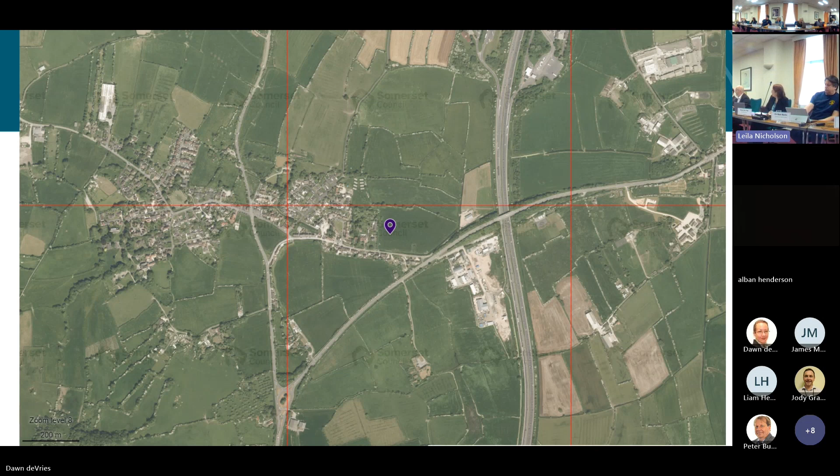So zoomed in more detail, it's a single large field. The application site excludes this area, which will come up on the red line plan in a minute, but just the area on the eastern side of the site. It isn't part of the application site, it's an irregular shape, but it's currently laid to rough grass and hasn't really been grazed for a while.

I've got a number of photographs over the years to show how the site has changed. There is the application site, very irregular shaped. The development is on the western part of the site. The thin line on the northeast side is part of the drainage works that are proposed.

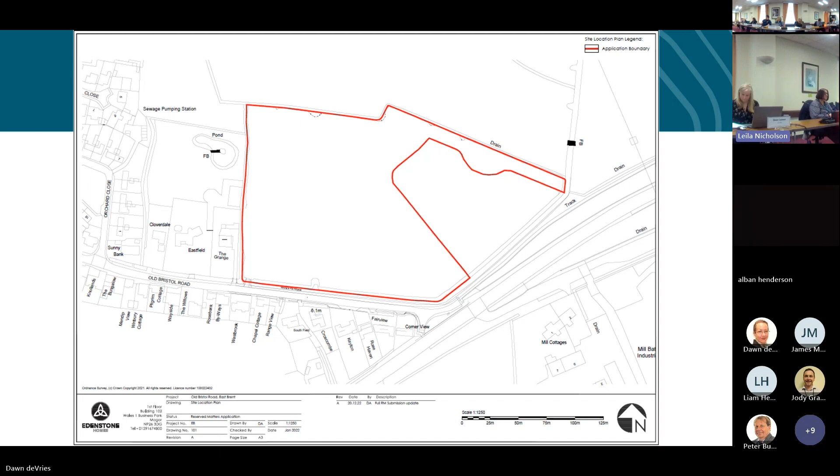That has now been agreed as part of the inspector's decision. The original outline went to appeal, the appeal was allowed, and the inspector has accepted that this can be provided. So that is all set in stone, as it were, through the grant of outline planning permission.

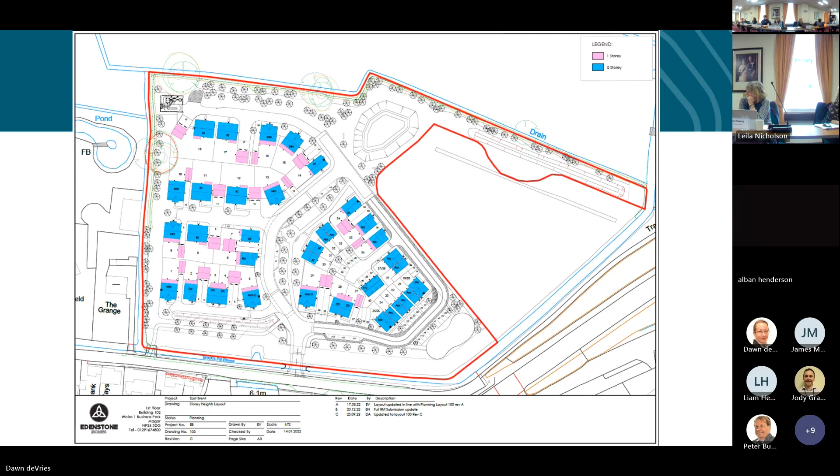Well, moving on to the drainage, just to give you a view of what we've got there at the moment. Brock's Pill Rhyne across the frontage is a maintained rhyne, the IDB look after that. And then the rhyne, the watercourse running along the west and north sides is maintained by the relevant landowners - I'll come back to that in a little while. But the IDB's area of control is across the frontage.

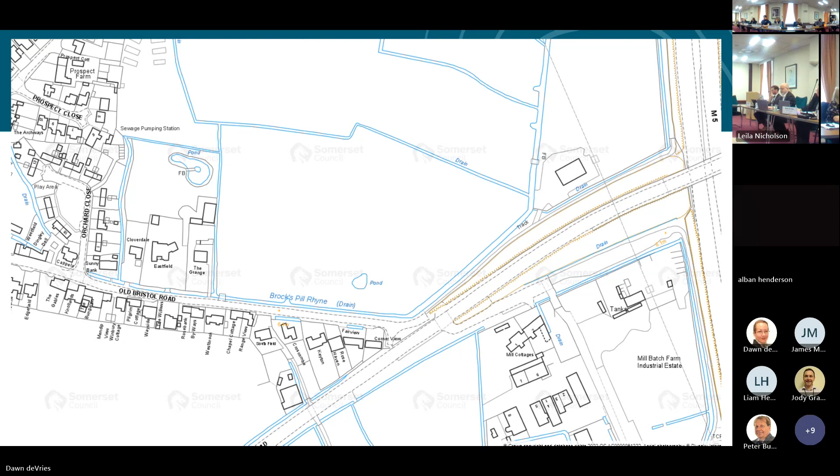It then discharges to the attenuation pond to the northeast, which then discharges via that pump solution into the swale that runs along the northeast side of the site, and then discharges into Brock's Pill Rhyne, which flows anti-clockwise around the site. That is all at agreed rates.

All the capacities and technical detail have been looked at by the LLFA, and they are happy that this is a working solution. We'll get the real technical detail through the discharge condition on the outline, but in terms of determining this application, they are happy with that.

So it is a pump, another pumping station there. Wessex Water do have pumps here, and they have not raised a concern about this scheme.

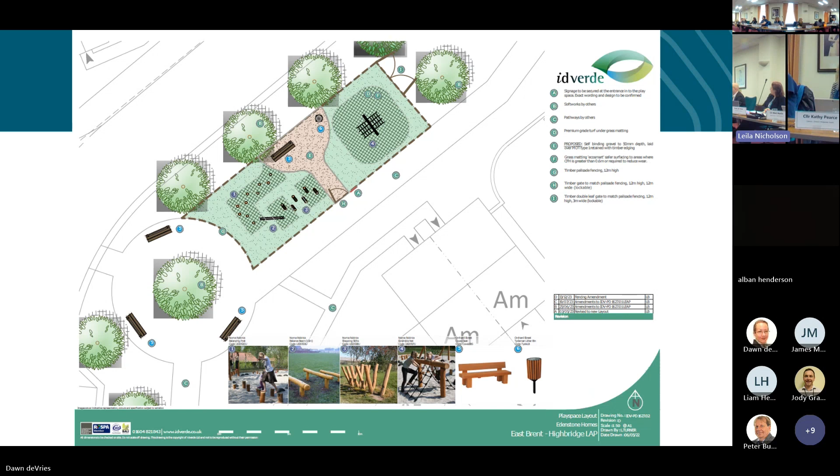Then the other area, which has more equipment on it for older children, down in that southeast corner of the site, indicatively laid out here. Again, the detail comes through this discharge of obligation.

There was an area of concern that this wouldn't be overlooked enough, being tucked away in the corner. I don't think I can agree with that. There are existing houses on the south side of Bristol Road with direct sight of it, just within 20 metres, that little row of houses opposite. So I don't think there's any reason to assume this would be an area of antisocial behaviour or play.

Landscaping, a landscape scheme throughout. I think we have a central area running through the middle which will have street trees, landscaped areas, and on-plot shrub planting in front of the houses. Round the north and west of the site, we have additional screening planting to mitigate the visual impact in wider views of the countryside. The issue has been raised down the west side.

There is a rhyne that is not maintained by the IDB. The IDB would normally expect about 6 metres there, but they are flexible on that requirement. I've got a little update on that particular point, with a slide and a photo coming in a moment to show that.

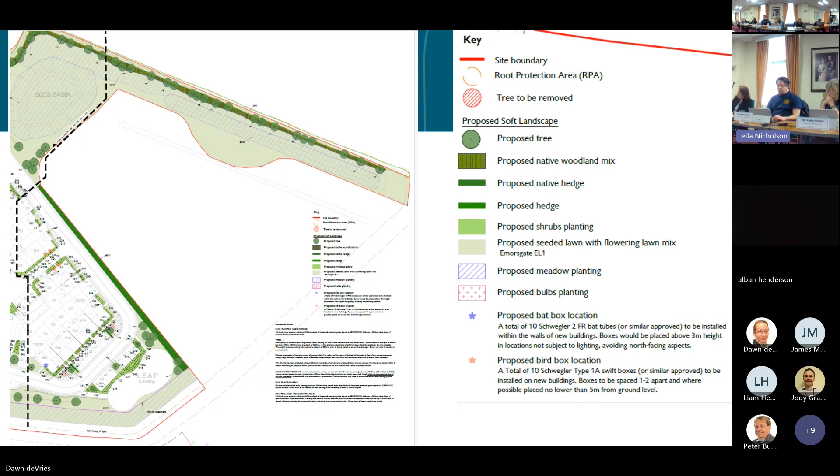Running through the other house types, this one's used on 5 plots, in render. The old one might have black tiles, but the majority here are brown tiles. This one's 2 houses together, one of the semi-detached ones, and one of a pair of smaller houses - you can see a nice organic form, like they've grown together over time, with one little flat over garage in brick in a more private area.

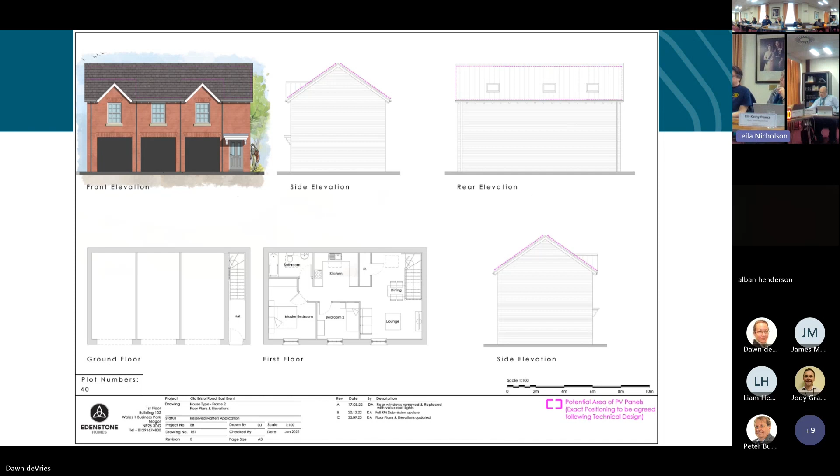I raised the possibility of rat running with the developer after local concerns were raised. They beefed it all up, and I've not had any further complaints since then that it is occurring. I do admit there may be the odd determined motorist who might choose to break the rules, but as with everything in life, unfortunately, we can't plan town and country planning on the basis of that fear.

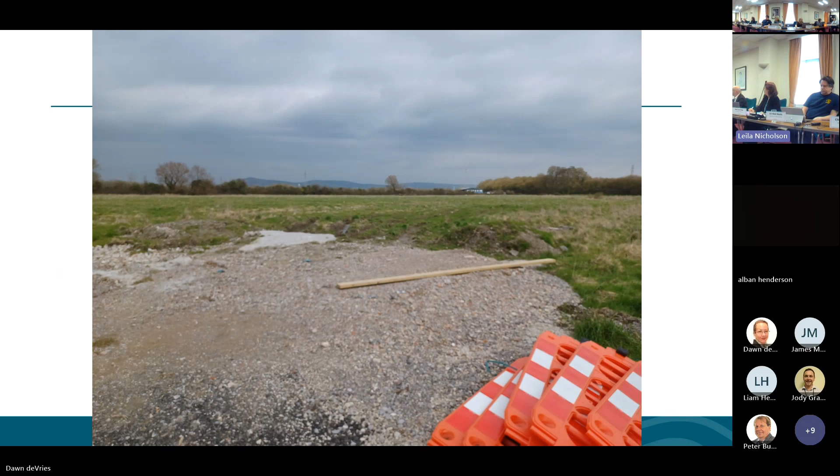Panning the camera around, looking all the way across the very far corner of the site, to that building on the neighbouring land, right in the far corner, with the A38 behind that big hedge. Prior to those works going in, that was looking back to the east along Old Bristol Road, at a different time of year, and then essentially the same view there, just to give you an idea of how it changes with the season.

There is, I think, some local concern that the proposed LEAP in the southeast corner of the site is quite close to this. I think it is a feature of Somerset. I didn't feel dangerous walking along there yesterday when I went out on site. Other people were walking their dogs along there - they didn't seem to be unduly perturbed by it, and I didn't feel unsafe walking my children along there at whatever age.

There are some things in life that we just learn to deal with, and I think reens are part of life in Somerset. I don't see any inherent danger any more than that property on the right there experiences with the reen opposite it. There's no reason to assume residents of the future development will be any more vulnerable to that reen than the existing residents, who I don't think have a problem with their relationship at the moment.

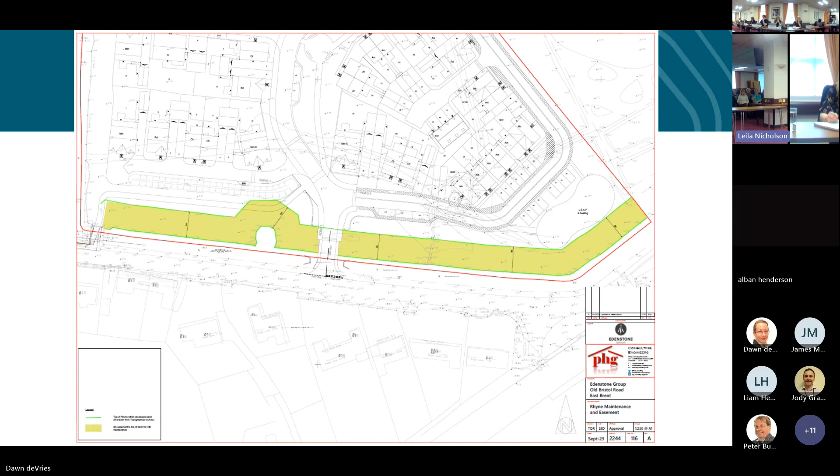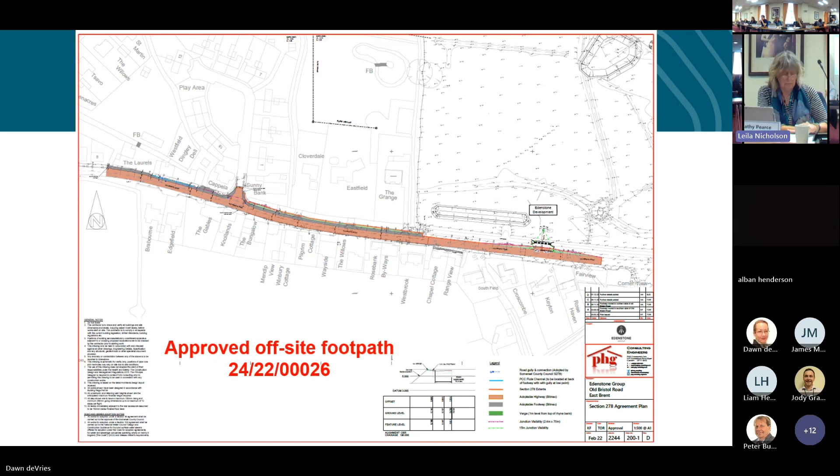The current access to the site for construction has been deemed illegal by the parish council, because at the time of approval we were not consulted. The parish council wasn't consulted, the residents weren't consulted about a major change to our road. Since then, they have issued a Section 278 agreement.

The construction mentions using the existing field gate access for preliminary works. I'm worried about the councillors' usage and the contractor's usage, as they have already weakened the bridge. The edges of the bridge are now sitting out from so much weight on it, and they put tarmac all in there. I've got video evidence of it dropping and compacting where the tube goes through the bridge, and they have done nothing to repair or make good.

The LEAP is situated in the southeastern area of the site, next to a deep reen, and cars are parked in front of it, obscuring the view of children coming out of the LEAP. This may cause a serious accident, if a ball goes over the fence and a kid runs off to try and grab it, ending up in the reen or in the road, because people driving up the road can't see them.

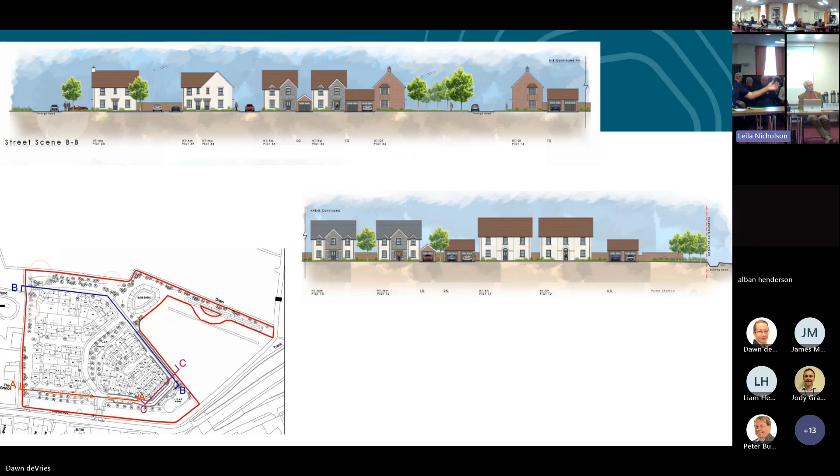The proposed ridge height of the new houses is approximately 4 meters taller than the south side. When my house was built in the 80s, there was a limitation that we had to match the ridge height of the two properties either side. How come they can go so high and tower over us? It doesn't make sense.

In the documentation, there's no mention of any access to the field to the east of the development area to allow the field to be farmed, or what is actually happening with this field. We've got no idea. And also access to the attenuation ponds and the pump that would need maintenance.

Thank you, Mr. Williams. Thank you. Sorry, I'm not very good at public speaking. That's all right, that's fine. I hate it. Goodbye.

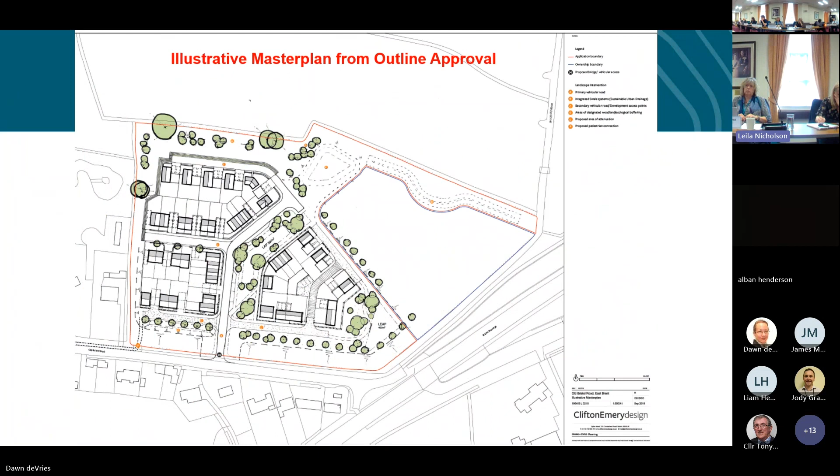Substantial public open space is provided in accordance with local policy, delivering both equipped play space and general open space throughout the scheme. This helps ensure the proposal retains a sense of openness, but also provides a pleasant environment benefiting both future and existing residents. The open space provided is, we consider, safe and attractive, having been informed by discussion with council officers and third-party consultees. The proposal also includes significant new native planting, reinforcing existing green infrastructure and providing new green links across the site, helping the council continue to address the ecological emergency.

The design and appearance of the housing has been informed by comments received on the application and discussions with council officers, to deliver a scheme which respects the local vernacular, using materials which respond to the prevailing character of East Brent, while also delivering homes to modern standards.

To conclude, the proposal represents a policy compliant scheme which delivers clear benefits to the local area and has been developed in response to comments received and discussions with officers and consultees. Based on this, I hope you can support the recommendation for approval.

Thank you. Do you want me to turn this on? Please. Yeah.

Thank you. There are obviously a number of issues raised there, which the officers could respond to, please. If there are any issues there that relate to a legal civil matter rather than planning matters, can you please make that clear to us as the committee? If you'd like to respond, and then we'll work through them all.

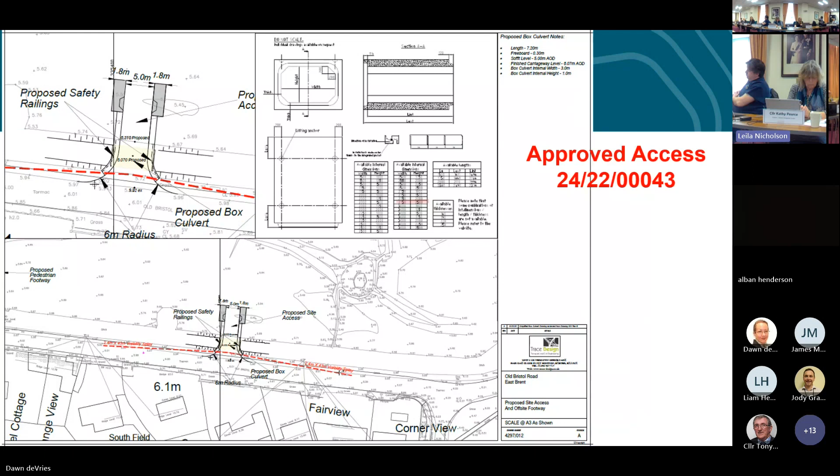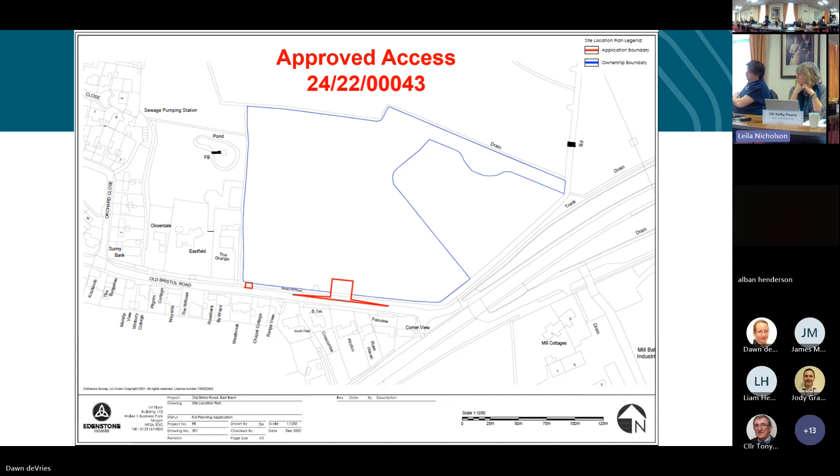It was determined by planning committee. So the access arrangements, pedestrian and vehicular for this site, and the emergency access have all been dealt with by means of full planning permissions that are granted and sit in the background. So those elements have been fully considered, fully debated, and are not subject to consideration for this application. So this application is the approval of reserved matters, details of the 40 dwellings.

Adrian went into a bit about the housing needs assessment because there is reference to a High Court decision in terms of whether the fact that the outline being up to 40 meant it could have been reduced alongside the most up-to-date housing needs assessment. But the legal advice we've had is that the housing needs assessment valid at the time the outline was granted effectively caps that number. So we'd be looking at an approval of reserved matters for 40, as established against the housing needs assessment that secured the position of the earlier assessment. We did query that advice through legal, and that is the response we've had back.

In terms of the detail, there has been some questions about flooding. There was some further information submitted - I believe it was directed to the LLFA and IDB in terms of surface water flooding. But in terms of detail, I'll pass on to Adrian to cover off a few of the detail points.

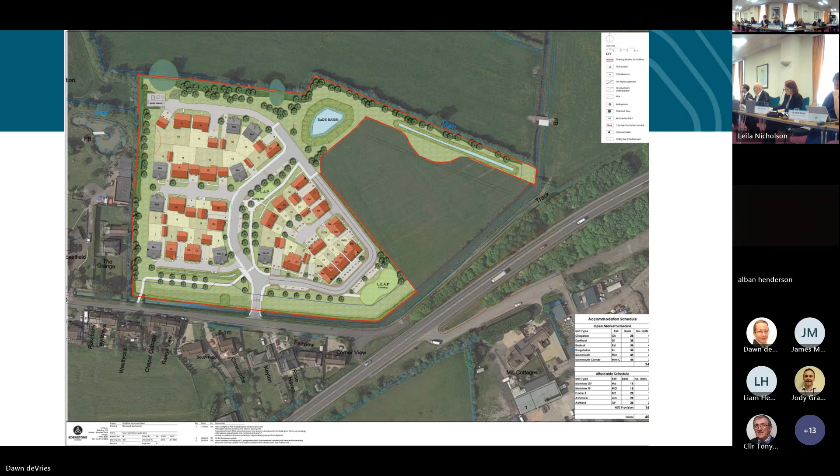At that point, when the inspector looked at it, there was no construction access down over there to the east, that one there. So the inspector said it's fine to run the construction up and down Old Bristol Road. Now that was felt to be - I was instrumental in that - I thought that was a bit much from that inspector. And we did encourage the developer to go for... we've got to accept these houses are going to be built. If the permission is granted, the principle's been agreed.

We agreed this access here. That, as Dawn said, came to committee, was fully considered. So I'm not quite sure how people didn't know that was on. As I remember, it was quite a full meeting and people were certainly aware that application had been submitted. And I see no advantage to closing this up and saying it's an illegally achieved access. The benefits of this construction access, I think, are manifold. We wouldn't want to lose that.

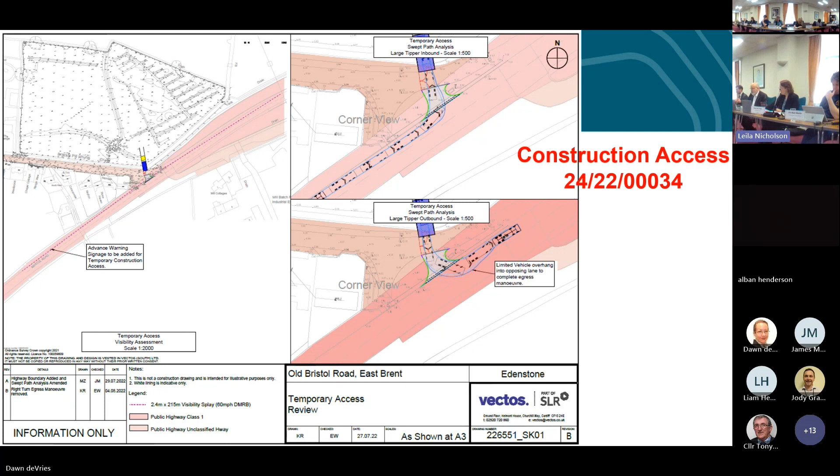In terms of the other issues, exceedance, the drainage thing - I'm looking desperately for the drawing. Now, what it does show, and apologies, it's not in this presentation, but we have an exceedance drawing that shows where surface water, when the pipes in the ground are surcharged because the rainstorm is so great that it's beyond the design of the system, where that would pool up. And this does show - there is a plan that shows a couple of areas where on the road it fills up to 65 millimetres, as said. That's a puddle on the road.

Now that is something that occurs on lots of roads, that the LLFA is aware of the potential for that exceedance, as we're doing that. And Dawn has just shown me there is a construction detail that shows how that would be managed in the curb within the road. Yes, it's factored in, it's known about, it's planned for.

Now, I hear the comment about the discharge rates at 3.85 being greater than 2 litres per second, 2 litres per second per hectare being the benchmark. Well, this site is... just remind me of the size of the site. I want to get that just right, but it's at the beginning of my report.

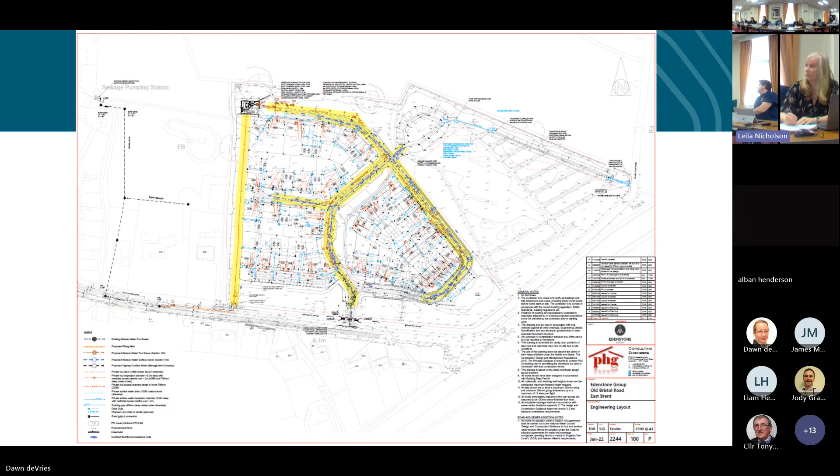And that flows, as I say, anti-clockwise around the site. The water goes away towards the north. So there's no reason to assume that this site, designed to modern standards, very heavily engineered in terms of the design criteria, the technical details and the volumes of storage - there's no reason to assume that would be likely to flood towards the property in Old Bristol Road, given its design. The existing situation is that, I suspect, water runs off into the rhynes either side and goes away as best it can within the normal course of maintaining those rhynes.

But we have the IDB saying they are happy with the arrangements. We have the lead local flood authority saying they are happy with the arrangements. And we have Wessex Water saying they are happy with the arrangements. They also have had this issue explained to them about why a pump solution is necessary - it overcomes other concerns. So from a technical point of view of the drainage, I see nowhere to go with that. I do hear the concerns from the floor, but I have no evidence that those concerns justify overriding the advice I have received from my technical advisors.

In terms of the affordable housing offer, there are reservations from the affordable housing manager, Mr. Harvey. I also had comments from others within his team saying it's fine.

There is a little bit of disagreement within the team there. The latest comments I had said what is on offer is fine. The houses, they're the smaller ones because they're the affordable ones. The need says this is what is needed.

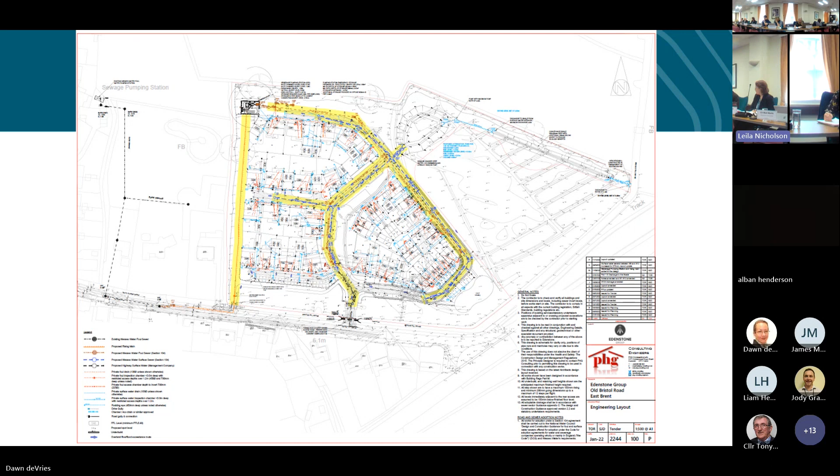If we go back to that affordable layout plan, those are the smaller houses. There's a group of them here - open market, shared ownership, and rented. One issue Mr. Harvey refers to, since there are two affordable housing officers who offered advice on this, is that the lack of garages on the affordable units is evidence of different design. I don't see that that is the case, really. If we look at the house types...

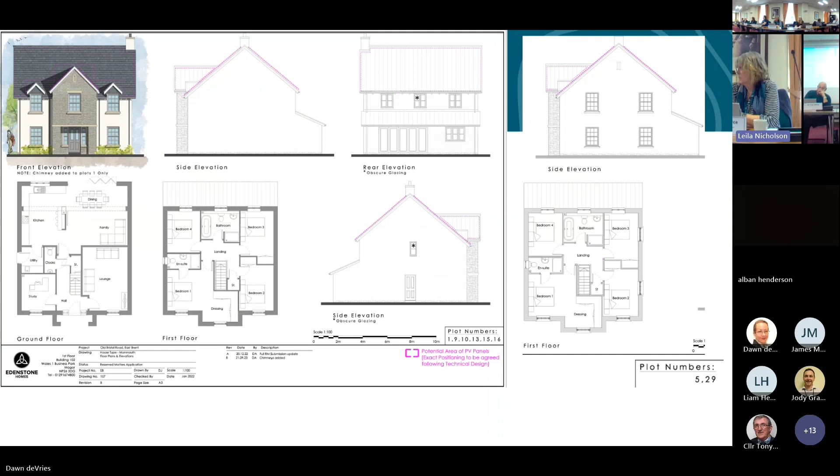Here's the house types. I would struggle to say, I mean, they're not marked up as the affordable unit. I would struggle to say which of these are the affordable ones. One is possibly indicative, but for the rest, the design is a common theme across all house types.

Just because the need is for smaller houses doesn't make them objectionable for being small - that is what the need reflects. They also need to be affordable. You start adding big gardens and big garages in, there's an affordability issue. So I think we have to accept that the affordable need is what it is in terms of sizes. For them to be affordable to the housing associations and future occupiers, they are of a certain size.

However, going back through the designs, I don't see that there is a distinct affordable home house type here. I mean, others may disagree.

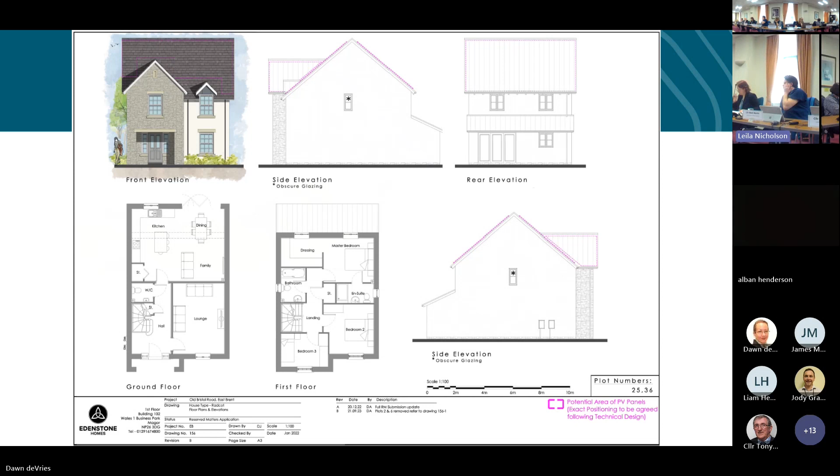Just in terms of other technical matters - yes, the LEAP that's there. If we look there, we have 20 metres from the nearest properties, and between 40 and 50 metres from those two existing properties. It's flat and level.

If we go to the boundary treatment, we have that orangey colour, so we have a 1.2 metre hit and miss fence around it - perfectly normal to put around, probably more to keep dogs out rather than children in. But it's not a barrier to surveillance at 1.2 metres.

Yes, there will be cars parked in that area opposite. Those are two-storey houses - they will see across it. There will probably also be their own children playing there. I think there's no reason to assume this is an unsafe place. My open spaces officer and the police architectural liaison officer have looked at this again, and they are happy with this arrangement.

There is a fundamental problem that this is aimed at bigger children as well. Usually, if you put that sort of thing in the middle of a development, the new residents will object because they don't want rowdy children playing. So these things do tend to be on the edge.

If the houses are turning their backs to them or there are no houses nearby, then we tackle it. In this instance, going back to that drawing, I think that is perfectly reasonable. In fact, 20 metres is the minimum specification distance between houses and play areas because of the potential for playing children to annoy people.

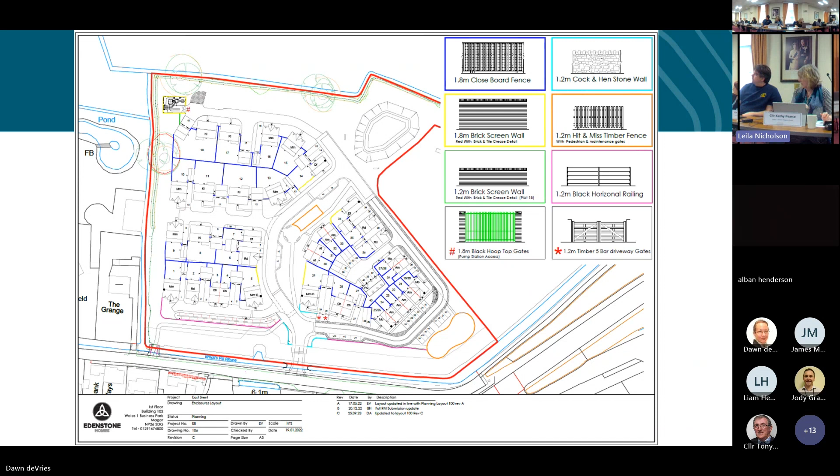Thank you. I've got a question regarding the west side rhyne and the possibility of an additional condition being added around maintenance. Who will be maintaining that rhyne? Will that be the IDB? No, on the west, I forget the exact term, but it's not one that they maintain. It is one that the landowners either side should be maintaining. There is obviously an issue with access from the opposite side, they've got some buildings awfully close to it, and the whole thing has been allowed to become overgrown. In a normal situation it would be down to those two landowners either side to deal with the issue.

We now have this area all the way around, which is open landscaped area, that would fall into the management company. We therefore have, in theory, a responsible body that we will know all about. With that extra condition, we get a specific maintenance regime for that rhyne and how they will work it with the landscaping - we've got a couple of trees in that area, so they would need to work around those, but no reason to assume that couldn't be done.

Okay, thank you, Mr. Moon. Any other members? Councillor Bradford - a couple of questions, Madam Chairman.

First one is, has there been a flooding issue on this land in the last six months? Because we just had the wettest February on record. Have people been able to walk across this land without wetting boots, or is it soggy? We're very soggy - I didn't wear boots on my site visit yesterday and it was very squelchy underfoot. It's as wet as can be, given this time of year, but not standing water. Okay, thank you for that. But they've gone through hoops actually to make sure it doesn't flood, haven't they? When you look at pumps installed, I've never been involved in a planning application where pumps have been used, I think it's the first time ever, so there must be a lot of risk there regarding all that.

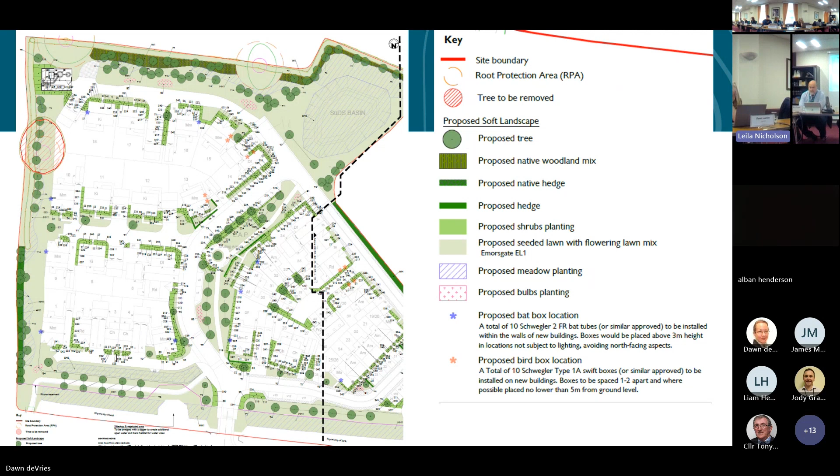They are indicated on the house type drawings. If you've got very good eyesight, there are little pink dotted areas around on the roof slopes, and that is referred to in the notes, bottom right hand corner: potential area for PV panels, exact position to be dealt with at technical design stage. It will probably come in as a function of building control to ensure that the house meets the current standards, but yes, they are indicated on all the houses.

Thank you, Adrian - and that's Dawn de Vries, by the way. Thank you.

Councillor Slocum: Thank you, Chairman. I'm a little bit concerned, and I'm sure Mr. Newton can help me, about the highways issues. They're not maintained the land previously, and there seemed to be a dispute about the land being there. Could you expand a little bit, because I didn't quite feel comfortable with that.

The fundamental dispute over land ownership and highways matters is in relation to that off-site footpath. There seems also to be a question that, in terms of bridging the Reen to get into the site, that may also have land ownership issues underlying it. That's not what we understand from the application or the applicant. They are confident that they have control over all the land necessary to do that.

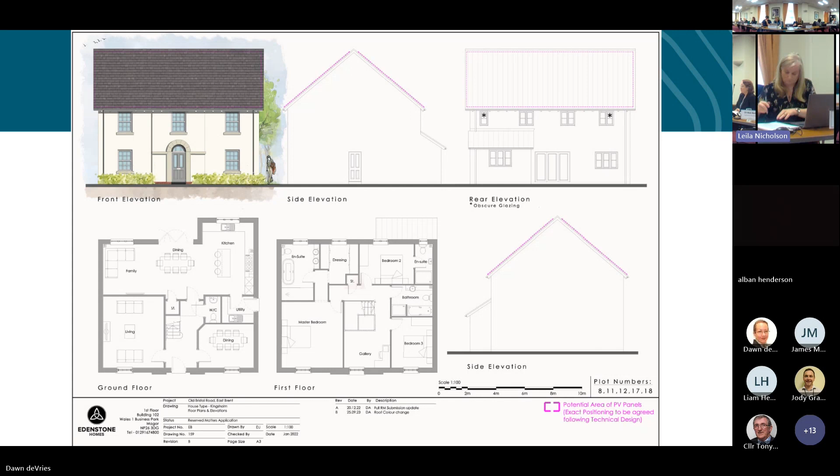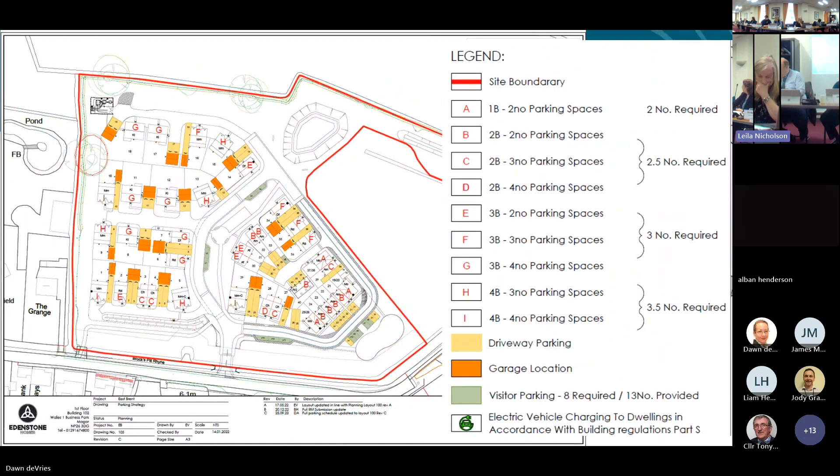That being the case, it would be an adoptable road from Old Bristol Road and into the site. And the plan, there is a layout drawing, that one there. So where the vehicles are tracked on there, that is the extent of what will be the public highway.

That would all be picked up through a section 278 agreement needed for the works to create the access where it touches up against the public highway. And then within the site, you have the section 38 agreement, which deals with getting the roads constructed to adoptable and then adopted standards. So, I'm not aware that there's a fundamental issue within the site to prevent adoption.

But if there was, it would come out when it wouldn't be able to be adopted. There is progressively, post-planning, a whole network of highways agreements the developer has to negotiate. Sometimes that takes a long time and adoption doesn't happen as quickly as we would hope. Sometimes the parties might walk away and say, fine, we just won't have it adopted. The normal thing for developers is they want their roads adopted. It's better for everyone. There's no reason to assume this won't be adopted. In any event, those matters will be picked up, subject to the Section 106 agreement. At this reserved matters stage, who picks that up is probably not relevant to our discussions today. It will be covered through subsequent highways agreements.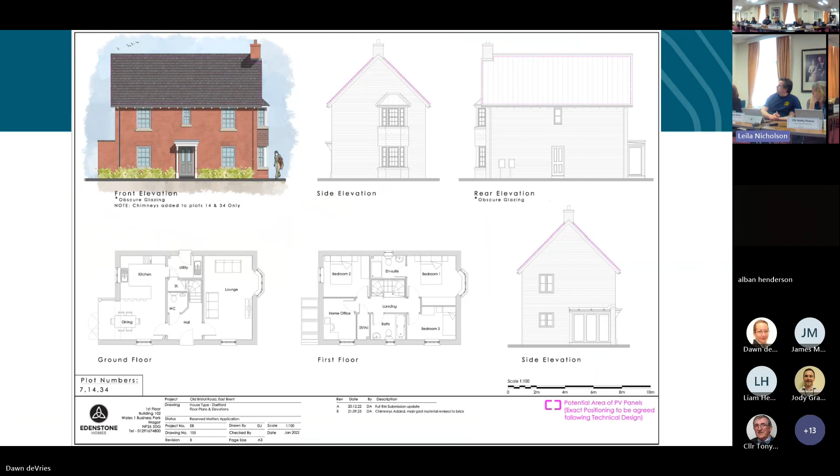It's more a case of, if a site is overlooked, if you feel you're being overlooked, people are less likely to behave in an antisocial way. That is the theory, there will always be the exception, but in terms of what we expect from a play area, this is reasonable. On other developments we might be saying it needs to be at least 20 metres, we might try to push it further away than that. But in this instance, I don't think, it's passive overlooking, we're not expecting anyone to control anything here.

And obviously we're not saying we should be relying on third parties. Chances are it will be the occupiers of the nearest dwellings whose kids are over there, so there is that extra layer of parental control.

In terms of the need and type, we have looked at the tenure mix very carefully. The tenure mix does reflect what's in the original housing need assessment. The type and sizes, the developer gave us all the details, they put it very clearly to us, because there was, charitably, a hiatus in that dialogue with the affordable housing colleagues. That was shared with them, the mix that we see on the screen there was shared with them, and the comment came back that that's fine.

I don't want to pull apart my affordable housing colleagues if they are saying different things in different circles. I don't know what happened at that meeting that was referred to. I haven't received any comments from that meeting.

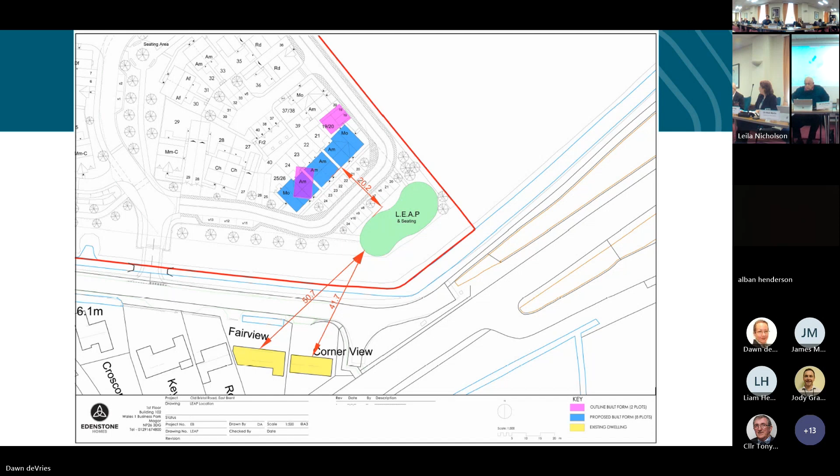What we're looking at today is those reserved matters - layout, appearance, scale, landscaping. The affordable housing is nailed down through the Section 106 agreement, so our affordable housing colleagues will have to sign and agree to that through the Section 106 agreement. If they really are saying this does not work, at that stage they can reject it. We hear the caveat that there is maybe two voices here. So this is what we're expecting to be the affordable units, these ones. But ultimately, the final say on those will come through the discharge of a planning obligation. It's not our decision today which ones will be the affordable housing.

This really is for information only. We can take it off the plans list if in fact it has crept on there. Normally I take them off the plans list because it is controlled through the Section 106 agreement, and we don't, as a committee, decide who lives behind which door. That is the planning obligation. We hear what's being said and we will note that for when we discharge that planning obligation.

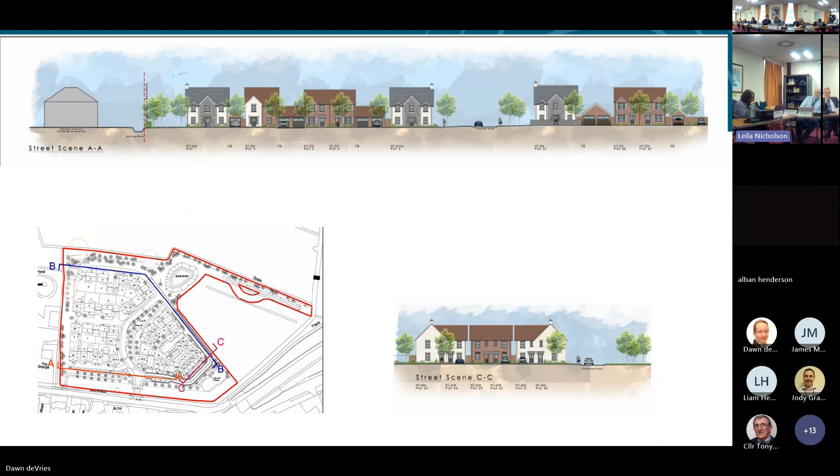Thank you, Chairman. I think we sort of slightly got offline with this. We wouldn't normally know where the affordables are, we wouldn't know where the rented are normally. I personally, as a councillor, like them clustered, it works better, the community works better, so I like the layout, I think it's very good. One thing I'd like to say, and I think everyone's taken a great deal of time today and that's been really good - it's a minor thing, but is there a better bin solution? Trying to walk that far for your bins, 20 metres, it just feels a bit much when most of us have our bins located very near. This doesn't seem a very good solution, or am I reading it wrong?

It is a compromise in terms of the layout. We would have to design the areas - let's get the cursor over here - so this area here is intended as a sort of soft area, probably brick pavers, somewhere where children can play in the street as they used to, with on-plot parking, not designed to blacktop adoptable highway standards. The consequence of that, which is a nice design feature, is that the bin men don't drive on it. So down in that middle one, you've got 1, 2, 3, 4 properties who'd have to bring their bins to the blue dot. The first two are quite close, the further one, yeah, 20-ish metres. It's not unusual in the countryside - if you live down a long track, you bring your bins a lot further, and you see bins at the end of tracks all the time. This is not uncommon on developments in Bridgwater, where you'll have this shared surface at the end of the adoptable highway, and bins are brought to there. So from that point of view, it's not objectionable. Anyone moving into any one of these houses would know this from day one - we're not imposing on someone against their will.

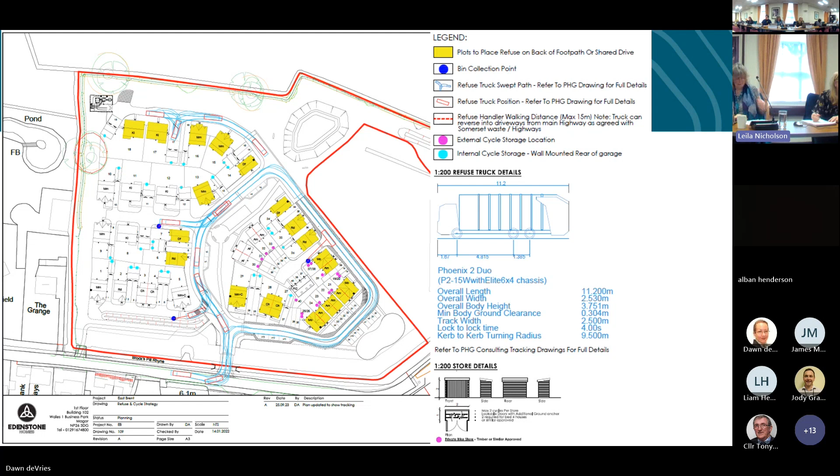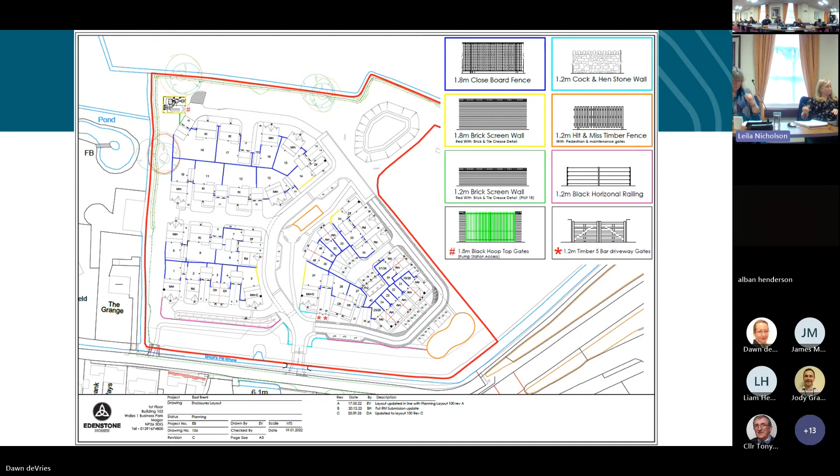I'd like to second the recommendation for deferral, and add to that: if we can defer so they can review the position of the LEAP and see if a more central location with better security can be identified.

So officers, do you need any more clarification on the reason for the proposed deferral? Was it about positioning, or confirmation from the affordable housing team that they're satisfied with the proposal, or a mixture of both? We as council are put in that position to try and make the decision for them, do we or not?

I've had experience before with affordable housing - when they come in for affordable housing, they want affordable housing, that's it. But at the moment half do and half don't, and the positioning and everything else that Councillor Bruce said could be well looked at, I think.

So just to be clear about what we're going back to negotiate with the applicant - in the event we get a supporting comment from affordable housing about the layout as is, are members satisfied, or is the placement of the affordable unit something they want considered?

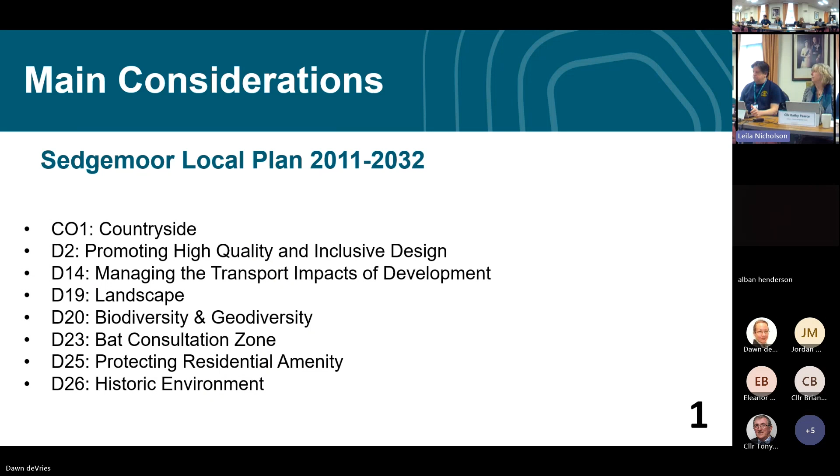This is a list of the relevant policies from the local plan in respect of this application. The application site is located within the parish boundary of Compton Bishop and within the Mendip Hills AONB, or National Landscape as it's now known. The site lies to the north of an unclassified road with an agricultural field to the east.

So in respect of the proposed detached garage building, this would propose to be finished with softwood weatherboard cladding and clay roof tiles. The footprint is approximately 6 by 7 metres with a ridge height of approximately 5.6 metres. The finished floor level of the building is proposed to be set approximately half a metre higher than the adjacent road.

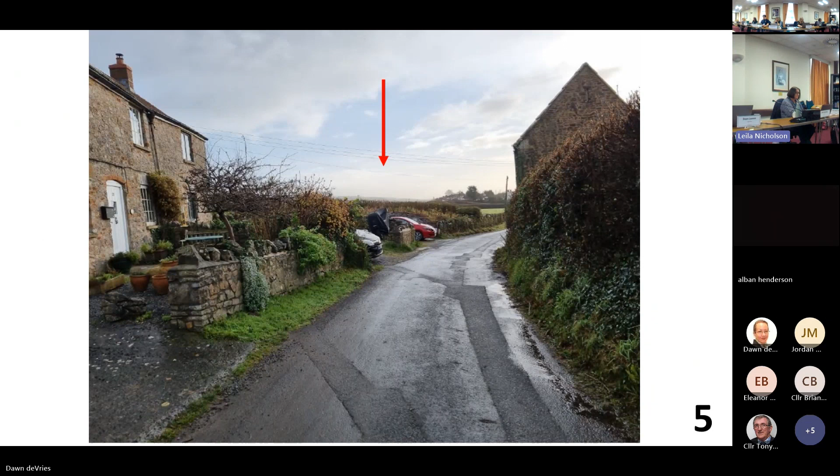We now move on to site photos. So this is a view of the site as approached from the west. Where the red car is poking out is the start of the site. And then this is a view from the east, so this is Church Road. Again, just photos as you approach the site.

And then we move on to photos from within the site. So this is stood from within the red line area, looking north towards the hills. As you can see, the land has had some changes already to make it domestic, with the planting of trees and other ancillary garden tools and things. This is stood within the site looking towards the west, and then this is viewing towards the south, towards the properties opposite.

So the application site does lie outside of any development boundary. However, as the change of use relates to the existing dwelling and is of a moderately small scale area of land, it's considered that the principle of the development is compliant with policy CO1.

In respect to visual amenity and landscape, the site does lie within the AONB. The proposed building is considered to be of an appropriate size and scale that is proportionate to the use and finished with traditional materials, and therefore not considered to have a detrimental visual impact on either the protected landscape or the character of the site and street scene.

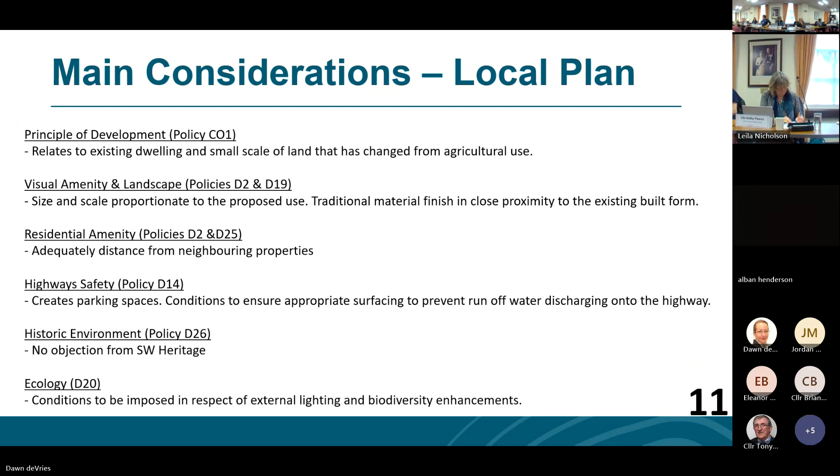You say that the land is already being used as a garden, basically. Is there any knowledge of the length of time that that's been used? Not off the top of my head. No, I didn't know that - after 4 years, if something's been built or anything like that, then that part of it wouldn't count, would it?

Just to come in on this, we spent a bit of time going back through some of the aerial photography just to work out how long they've been using it, because the change of use of the land isn't a recent thing. It appears it's been in place and in situ for at least 5 years, maybe a couple of years more. You can see from the hedgerow along the eastern boundary that it's quite mature, whereas previously there was no boundary at all - just the corner of the field, if you go back to aerial photography slightly more.

So it's not been regularised, it's been changed - it's been an unlawful change up until now, and they're obviously trying to regularise that as part of the application. But certainly it's been there in place, and we're not aware of any enforcement-related issues that have arisen from it. So I would suggest it's maybe 5 to 7 years, maybe slightly longer, but we couldn't confirm because the aerial photographs aren't available every year.

So if you go back far enough it just disappears. So around 2014, possibly some point after that, but within the next 4 to 5 years it arrived. There's been no complaints, no enforcement, thank you.

Councillor Slocum: It's just a minor thing, sorry about this. You said it was wood cladding. The only thing I'd raise, I'm absolutely fine about everything else, is that wood cladding goes so ropey so quickly. In my area we've had some garages done with wood cladding, and in no time at all they've just gone rough and horrible. Is there any alternative, or is that it?

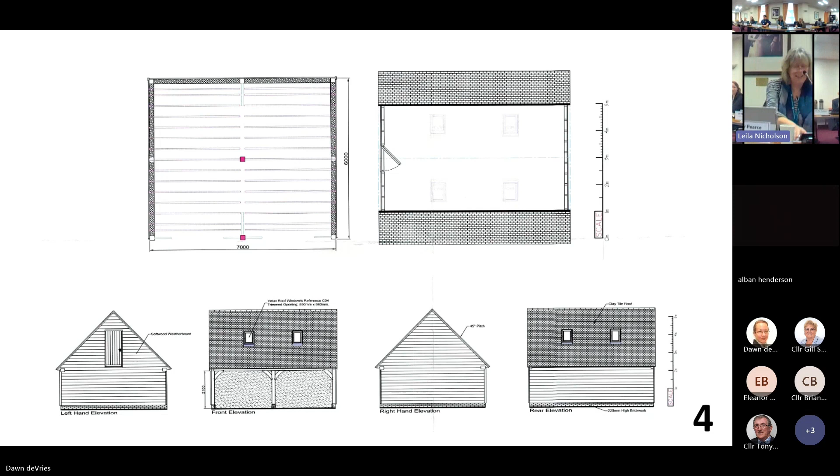Okay, thank you, Councillor Henderson. Thank you, Chair. This is as simple and straightforward as it could be. It's not causing anybody any problem, doesn't impede on any other property, it's not out of the way, it's not too high, it's not too big, it's nothing. So on that basis I recommend, and also move.

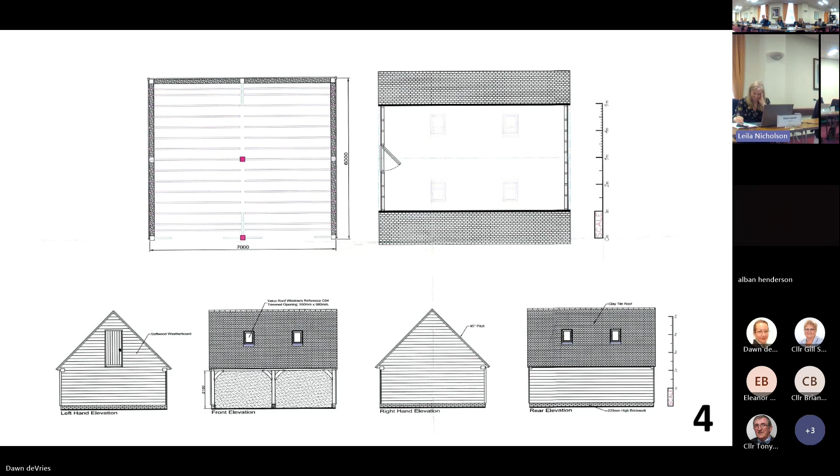Thank you, I'll second that. Well, I think Councillor Martin beat you to it. Oh, I'm that, so sorry. Everybody beats me now. Councillor Bradford and then Councillor Filmer. See no harm in it, Mr Chairman, no harm in it.

Councillor Filmer: Just the one question if I could. Do we have anything that shows the elevations in relation to where the new build goes in relation to the stone cottages?

I think from the parish council comments, that was one of their concerns. It was being placed right at the front of the site, where if set back a little bit within it, it would have had no impact whatsoever. Again, when you show the photographs, as you come down you've got the stone cottages, then you'll have a block in front of you as you come down that road. It's not enough to say no by any means, but I think the concern they raised was that it could have been done in a less impactful area, given how incredibly rural this particular area is. So that's where their concern came from, and why it wasn't totally as straightforward as might have been put by some of my colleagues.

But happy to go along with what's been said. I would just add that this was something I was also concerned about and did negotiate with the applicant. We did look at potentially other options, but due to, I think, a septic tank and some drainage pipes, and also the fact that they had planted some trees which have started to establish, it was considered there was no other option within the site. Thank you, oh that's useful to know, isn't it?

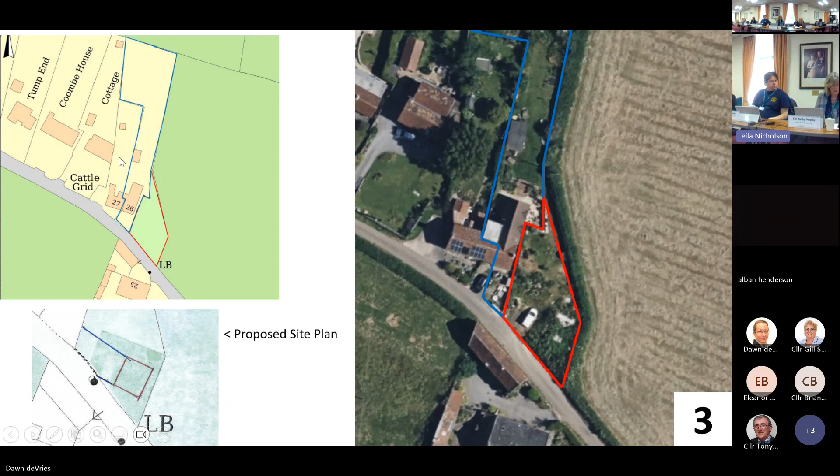So that brings us to the end of the applications. Just one other agenda item, and that's planning appeals decided. Please, do you want to take us through that? Yeah, that's the thing.

So we've got two decisions for you. We refused a lawful development certificate for the use of a storage yard for business purposes, subject to appeal, at land south of Parchy View, Ward Lane, Chedzoy. The appeal was dismissed, so they supported our recommendation on that. Secondly, there was erection of a fence wrapping around the western, northern and eastern boundary with an access gate, replacing existing fencing at Bristol Road, Rooksbridge, which again we refused planning permission, subject to appeal, and the appeal was dismissed. So two quite good decisions for us.

Excellent, thank you. If there's no debate around that - oh, Councillor Filmer. Can I possibly raise a question? I don't know whether it's now or at the end, it's not relating to these but it is relating to planning and enforcement. Well, I think this is the end of the meeting, so I will thank members for their comments and declare the meeting closed. And now you can ask.